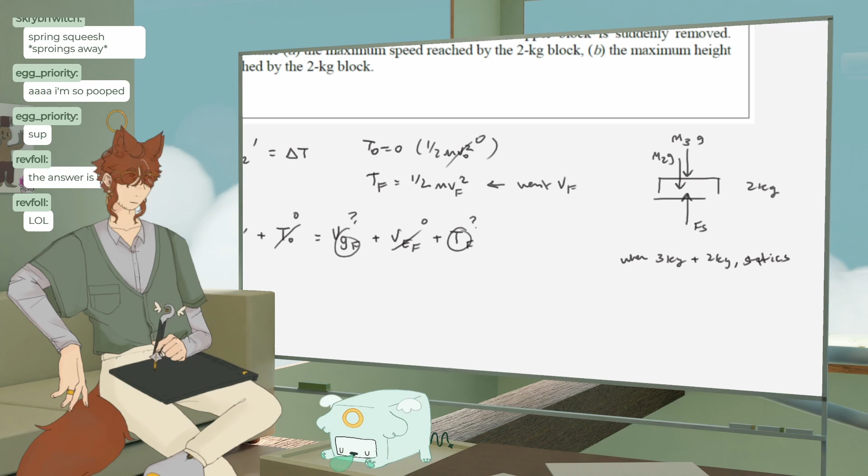Okay, we got Paper Mario.

Sorry, wait, I'm on Twitch? Yeah, we're all on Twitch.

Okay, so FS, this is great. So FS equals... because then we can do displacement. 3 plus 2, I almost wrote 5, times 9.8. Is how big our spring force is, okay? That's a big win, everybody.

We just found out this beautiful gentleman's credit card number. It's 49. I don't know how that's his credit card number, don't ask me.

Okay, so we got 49 newtons of spring force. That means that that's gonna act on our thing. Okay, sorry, my brain stopped working for a second. So, okay, we know that there's... okay, we need the maximum speed, but I feel like this is gonna be our maximum height.

I love finding out beautiful man's credit card numbers. Okay, yes, I also love that.

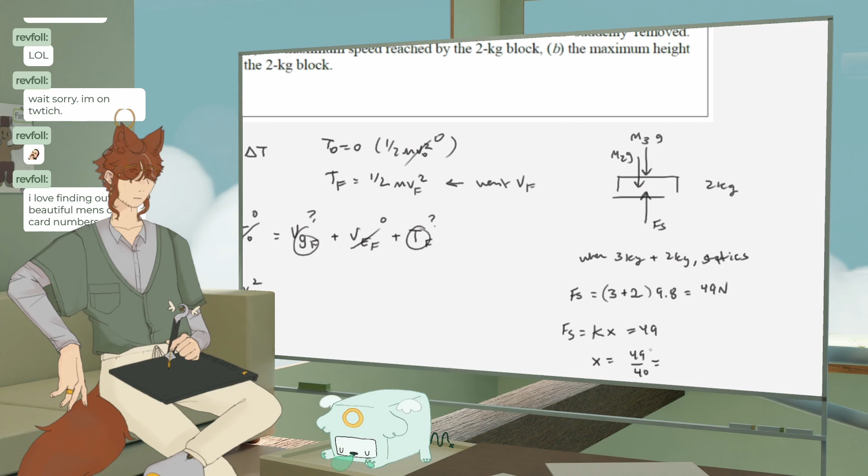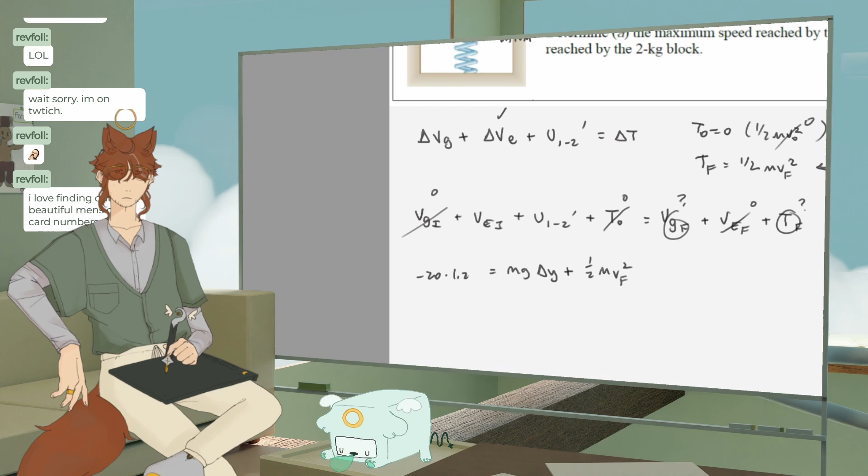So x equals 49 divided by 40. That's how much we've gone. That's how much we've squished the spring down. So then I can find the energy, and then we can have a beautiful life together. Okay. 1.225, that's how much it goes down. Okay, so it's not this. Get out of here. Okay, so 1/2 kx squared, or so negative, I guess. We're gonna just pretend that the numbers, the signs, are just whatever for right now. So k, so negative 20 times 1.2 times 1.225 squared. Okay, great, so that delta y, we don't know.

Is there any way that I can know it? Is there any way that I can not know it, actually? Let me think. Because if we think about it, the way we're putting in work is by this spring, right? And the spring is giving us all of our velocity and our gravitational potential, so it is a split between the gravitational potential and the velocity. So, do we know how much it would split between the gravitational potential and the velocity?

Wait, I'm supposed to be not doing dynamics right now. Wait a second. I was not supposed to be doing dynamics right now. We gotta take a detour, chat.

What is this? Oh, quiz 1. Okay. We gotta take a detour to work on, where's this thing? This is so sad. Wait, maybe it's not. Wait, maybe it is. What is, huh?

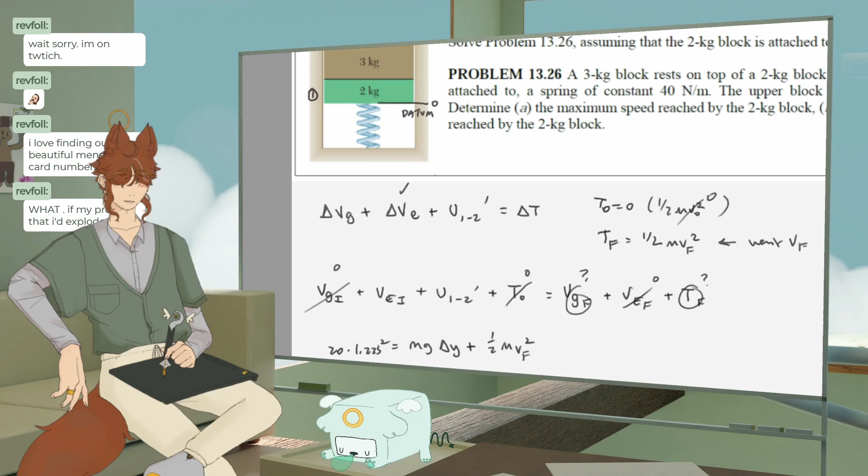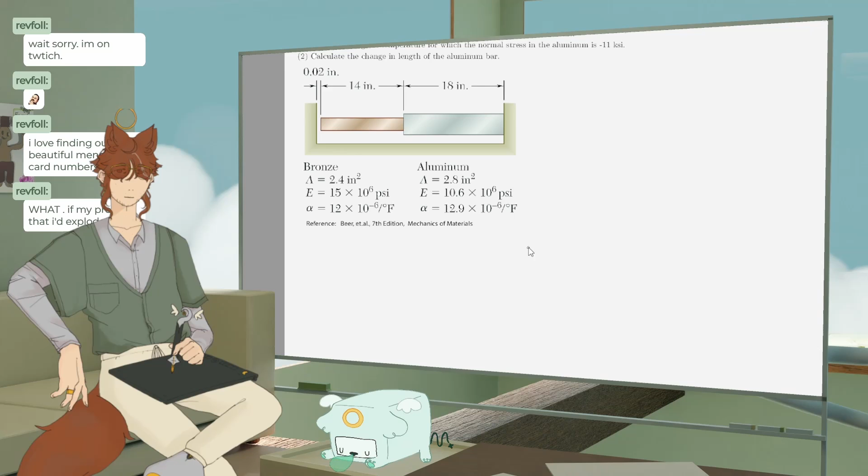It's okay, see, if you don't do the work, then you can't get mad at the work. Wow, that sucks, sorry, not being done. Okay. Beer. Big guy. Okay, sorry.

Find the change in temperature for which the normal stress in the aluminum is negative 11 KSI.

I'm so real for that. Yeah, well, to be fair, I'm doing this quiz that I have to do tomorrow, and this is the problem that's gonna be on it, or something like this.

Okay, so... everything sucks, but that's okay.

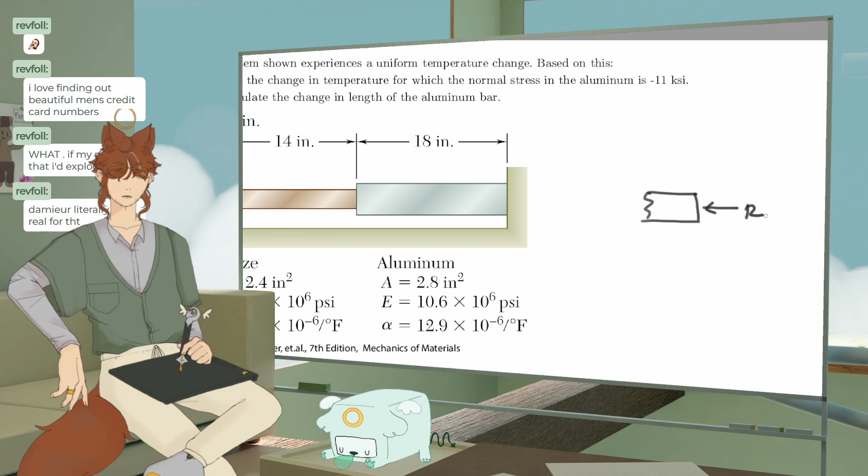We have to do some cross sections. Our first one is gonna be on this aluminum. There's a reaction here, so there's gonna be a reaction at A. Let's call this one A, B, C. And so we have to have a force, an internal force - I'll call it that, it's a bar. It's our TAB, well, I probably shouldn't call it T, I should call it F. I've been doing torques too much. Okay, so we have this one, so our RA equals FAB.

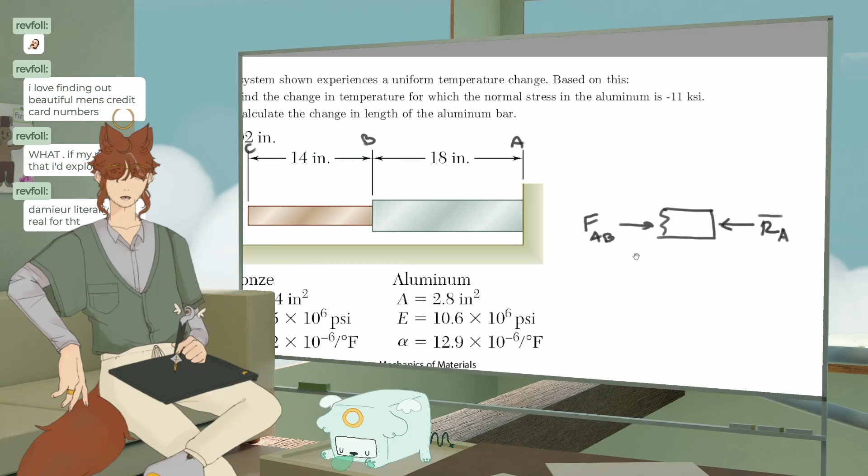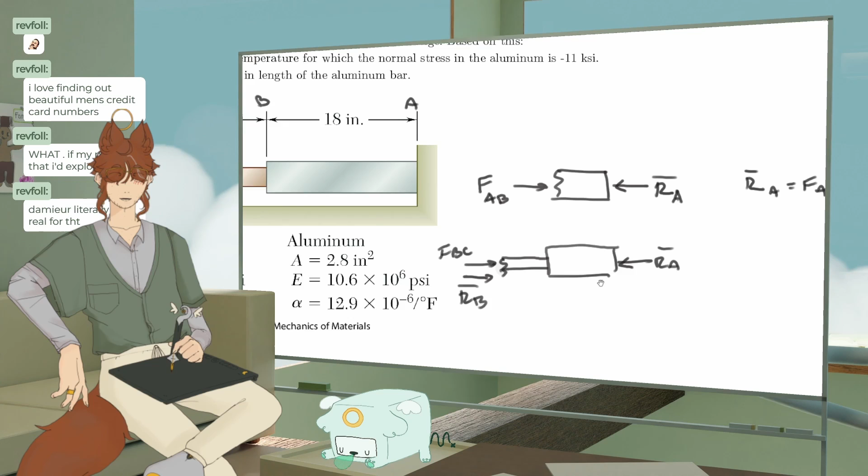And then we have this other dude, this one. It's bad, but that's okay. We've got the same reaction at A and FBC, I believe, just because there's no extra load. If there was another reaction, we'd have another reaction, but there's no reaction there. Well, actually, there's a reaction here, I lied. Don't worry about it. Wait, no, there wouldn't be a reaction there. No, we're fine, we're fine. Don't worry about it, chat. I wouldn't lead you wrong.

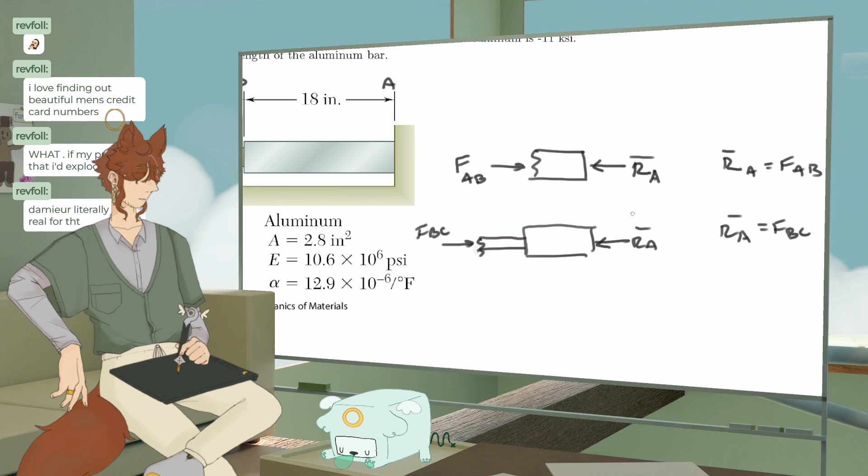Okay, so we have 3 unknowns. That's what we need, we need 3 unknowns. Because if there's only 2 unknowns we could solve it, but we have 3, which is bad, but that's okay. We're gonna solve it anyway because we're awesome. We're swag and cool, and okay, so we did our equilibrium.

It's pretty chill. Our constitutive equation - the deformation in AB is going to equal FL over, PL over EA for AB, plus alpha, whatever that thing is, numbers, letters, same difference. BC is going to be the same thing.

There we go. Okay, now we can start plugging some things in here. So for the deformation at AB, it's going to be this force AB, so that's RA, times the length, which is 18 inches, over E, which is in PSI, so that's good, we're in pounds per square inch - 10.6 times 10 to the 6 PSI, times our area.

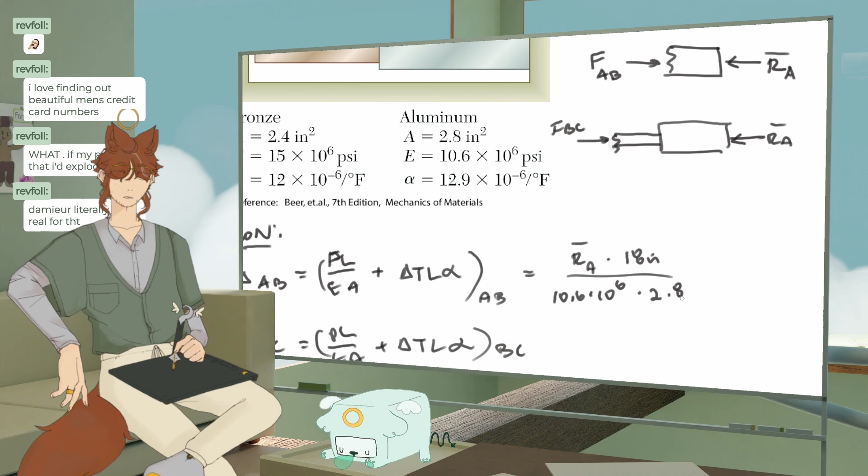Oh, it's lovely, they just give it to us. They just hand it to us on a silver platter. So now we can get a little number out for RA here. 18 divided by... This class is very boring, by the way.

Dude, the Pharaoh's Curse, what is it? I don't know what it is. I'm so sorry, I'm so sorry for the cozy tag.

I'm gonna cry. For everyone who came to just have a nice mechanics of materials problem, just like mechanics of materials and chill, I'm so sorry. I forgot to add the temperature. God damn it.

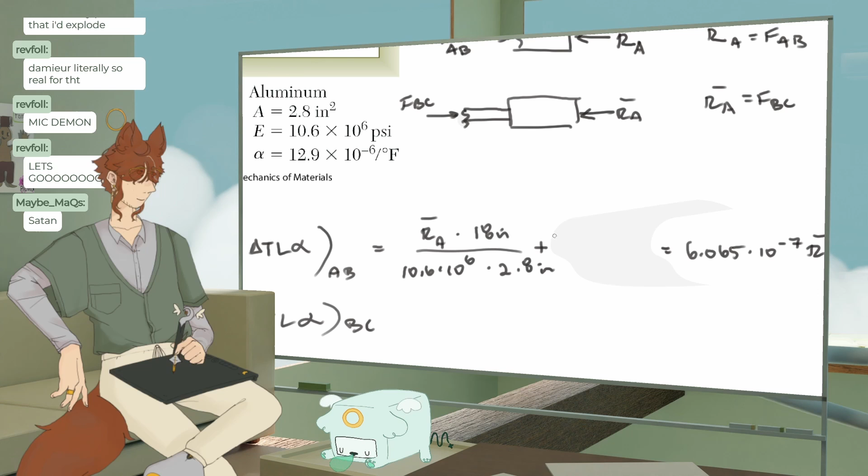Okay, don't look at that. Oh, that's gonna really annoy me. That's fine, my whiteboard is a little not white there. It's because I usually work on this because it's like better for my eyes. It's fine, it's fine, it's fine. I'm so normal.

The mic demon asks, what's the temperature change? Oh, we're trying to find the temperature change. Lol, okay.

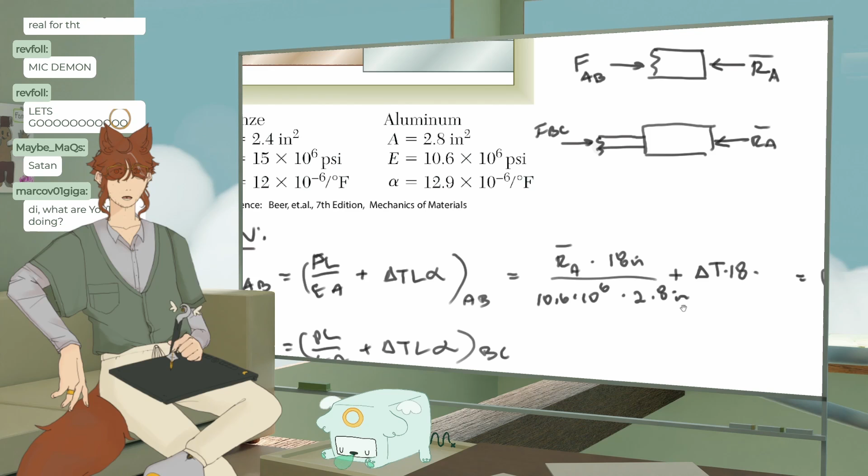And then I have my alpha here, which is 12.9. Okay, we're gonna have 2 equations and 2 unknowns, which is good enough for me. So we'll probably just chuck them into a, whatchamacallit, matrix. I'm just chunking this number in here.

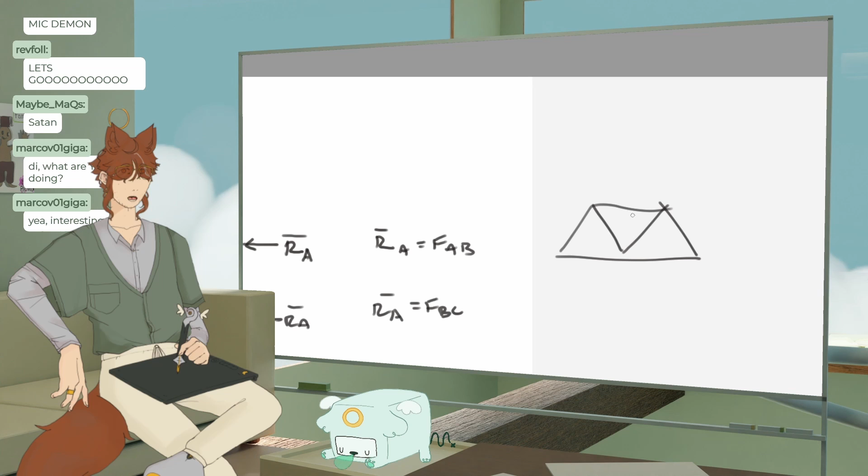Yeah, interesting, yeah, it's pretty cool. Like you can figure out - one of the really cool problems we did, maybe the coolest one in the class, was about bridges that aren't strong enough. Like there's a pre-existing bridge that's not strong enough materials-wise, maybe it's rusted or not seismically up to code. And you'd have to take out the whole bridge and rebuild it, which would be a lot of money. But they figured out you can add a certain polymer wrapped around the pre-existing concrete that makes it stronger.

So the question is how much of this do you need to make the bridge actually strong enough, to have it not twist or break from the force. You can figure that out by doing this kind of analysis, which is really cool, because we did it and figured out that you could reduce the twist by like 50% if you only wrap it twice, which was pretty cool. You don't have to take an entire bridge down, you can just wrap it with some shrink wrap essentially, and it makes it strong enough. Pretty awesome, pretty epic actually.

This one is also RA. I may be doing this wrong, but that's okay.

Oh, I'm so glad I don't have to calculate the polar moment of area. I don't like doing that calculation. It's 15 times 10 to the 6th times 2.4. It's delta t times... where did I get that 18 from? Oh, length, 14 times 12.

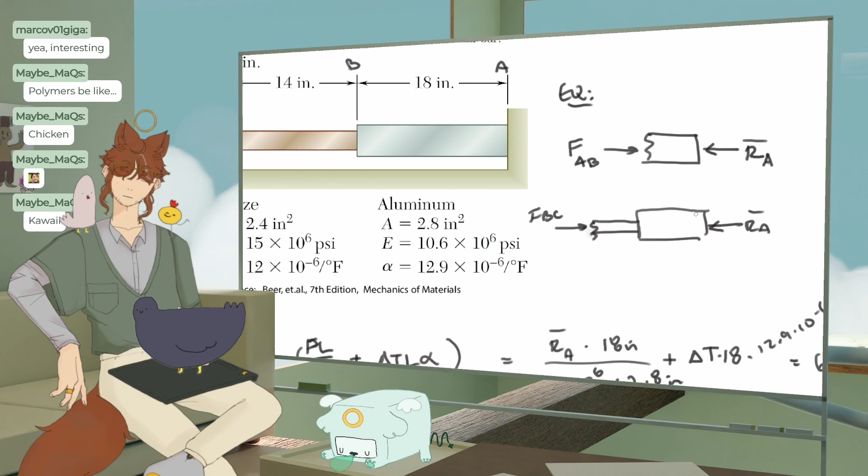We have to do the kinematics. So we have these beams, and we have to find the change in temperature for which the normal stress in the aluminum is negative 11 KSI. Okay, so what that's saying is we're gonna have to relate these deltas. But we also need to say that the stress... that's the stress, I think. Maybe, I don't know, don't look at me. The stress in the aluminum, which is AB, is equal to the force over the area. So wait a second, it's equal to, wait a second.

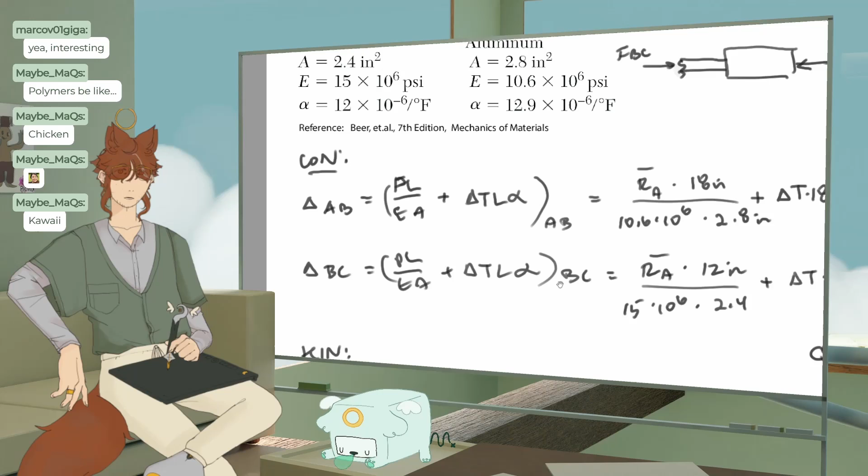Is this really that indeterminate of a problem? This feels not that indeterminate, it feels like they're giving me a bunch of stuff. They're giving me negative 11 KSI. Wait a second, okay whatever, negative 11, the negative is weird a little bit. So that means that 11 KSI, so 11,000 equals, or times area, which is 2.8, equals FAB. Wait, they just gave it to us? Wait, I thought we had to solve for RA. Huh? What? Did I accidentally click on the determinate problems? No, this says that it's indeterminate.

Can you explain all of basic physics to me? Oh yeah, sure, okay, yes I can. What would you like first? Is this just like for fun, or is this like you're in a class and having trouble with all these things? Because that will change the way that I talk about it. But dynamics is basically physics, so it's a great place to talk about stuff conceptually, actually.

This is so weird to me that they just give us this. Because then, what are we trying to find? The temperature change? Oh, wait, we have the temperature change. Okay, maybe we do need this. Yeah, I need this for a test. Oh okay, let me think while I do this.

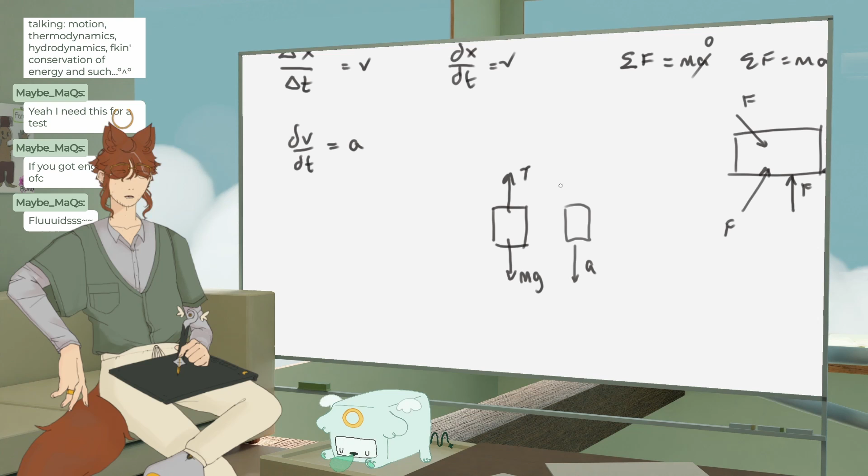It's conceptually useful to be able to see how, if one force changes, that changes the other forces. A good example: if you have a weight with tension going up and mg going down, and it's accelerating downward, knowing how changing the mass changes the acceleration, and how that changes the tension, is really good to be able to visualize.

Some people like to visualize it as bars, like if I have forces in equilibrium, if this one goes up, this one has to go down by the same amount. There are lots of different ways you can do that, but it's always a really good skill to be able to see or understand the relationships between the forces.

It'll make your life a lot easier for questions like this one, where if it's at the top of this thing, the potential energy is going to be as high as it's going to be, and we have no spring. If I was doing 3.26, we'd have no spring potential energy because that has all been converted to kinetic energy.

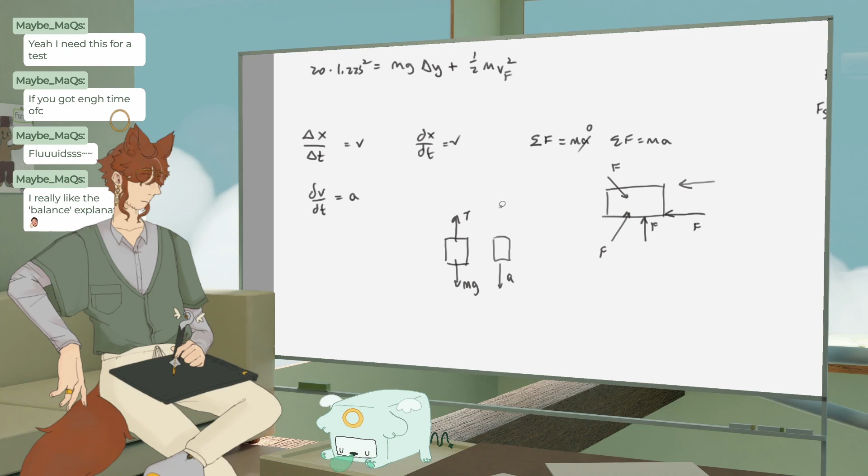Not about forces, but I really like the balance explanation. Yeah, me too, because physics is a lot about that, especially with thermodynamics. If you have PV equals nRT, saying okay, if I put the pressure down, but volume has to go up to keep the temperature the same.

Being able to see that and be more familiar with it, because it's not really a math thing necessarily, it's more intuition, more logical. Let's say with nRT, if V is constant so we don't have to worry about it, if T goes down, our pressure is also going to go down.

Being familiar with the relationships in physical equations - whenever I learn a new physics equation I try to do a mini proof in my brain. Take the displacement of a bar in mechanics and materials: it's PL over EA. As the force increases, our displacement increases, which makes sense - a bigger force on the end of the bar makes it go down more. Similarly, if our bar lengthens versus is very short, it's going to deform way more under the same force.

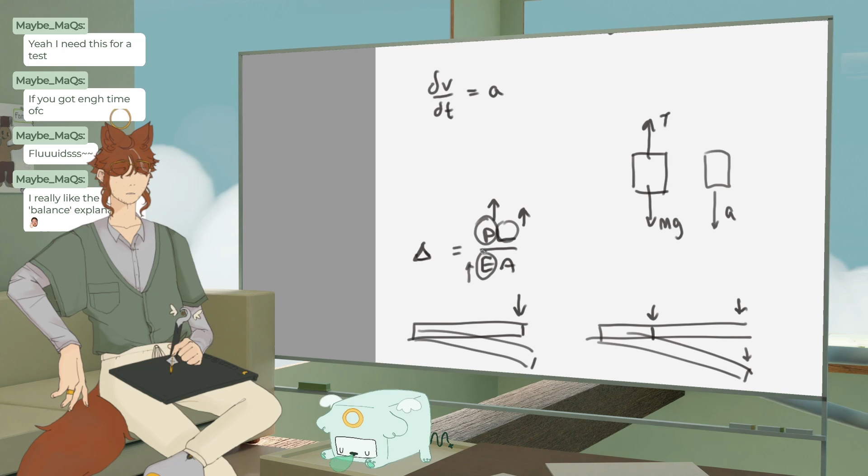So that also makes sense being on top of the equation. Then as the elasticity goes up - which is kind of weird - as it gets more elastic, we're going to have less deformation. Same thing for area: if the area gets bigger, we're going to have less deformation. Being able to see this matters because you're not asked to prove it, but knowing how the variables in an equation change things is really important for understanding physics at a deeper level.

So you have forces, you have motion, and putting those together you can talk about work. In simple terms, work is a force exerted over a distance, which gives us a unit of energy. If I have a force over this block and it moves 1 meter, how much energy have we put into the block to get it to move? Or an even simpler example: if I have a block on the ground and lift it up, how much energy have I given it?

Talking about work, there are lots of different ways to find work, and it's kind of a funny, weird little concept because you can have conservative versus non-conservative forces. My professor explained this really well. Gravity is an example of a conservative force. We can move this block up and down as many times as we want, but as long as it goes up here, it doesn't matter what we did in the middle, because it's conservative. It only matters the start location and the end location.

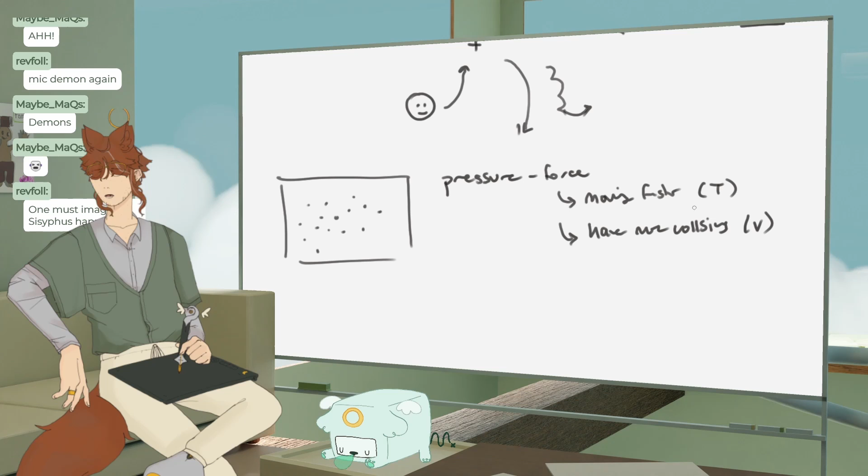The big things to know are like pressure is based on force. So a couple cases that might make pressure increase is if your molecules are moving faster, which means they're hotter, so that has to deal with temperature. Or if they have more collisions, which has to do with volume. So if you're making your container smaller, your particles are going to be hitting the walls more often, so they're going to have a higher pressure. Or you can just have them move faster, and that's going to give them more energy, and when they collide, conservation of momentum, conservation of energy stuff, they're going to exert more force on the wall.

What else? Temperature is like the average, basically just speed when you're talking about thermo, like average kinetic energy of a particle. The only type of energy you can technically have is velocity-based. You can have potential energy, but it's not really real energy - it's just kind of the idea that you're going to do something sometime soon.

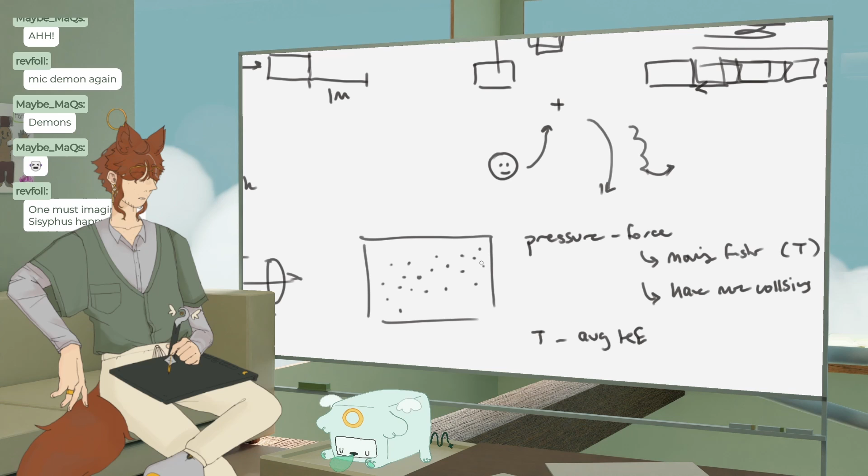And then volume is, I feel like, more self-explanatory. If your volume gets bigger, it's not going to affect your temperature necessarily, because you aren't changing the speed of your particles, but it is going to affect the pressure. If you have a bigger volume, you're going to have less pressure.

I think you said conservation of energy. I feel like conservation of energy is actually not super tough. All the fundamental stuff - that's crazy, that's like a lot of stuff. My first semester of physics was mechanics only. But then again, I had to take physics 3. But it was also first quarter physics, so semester versus quarter is a little different.

What was I going to say? Oh, conservation of energy. Essentially, the idea is that energy can't be destroyed, ever. It's always going to go somewhere.

So that means if you have a block and it's moving and going over a rough surface, we have energy that's lost as it slows down, which is going out into the environment as heat.

So conservation of energy or conservation of momentum is just taking all of the momentum, all of the energy, and accounting for it. All the energy you have at the start equals all the energy you have at the end, which is exactly what I was doing here.

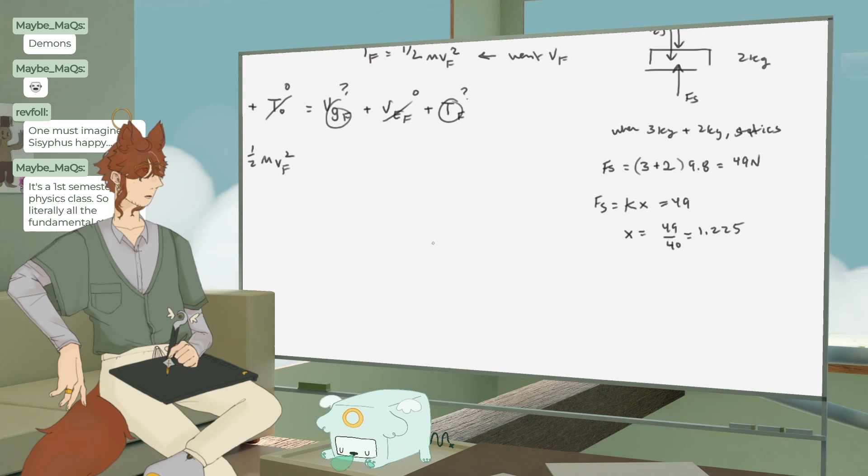But when it comes down to it, really everything is just a particle, and it's all particle physics. So that's your kinematics, your work, your forces, all that kind of good stuff.

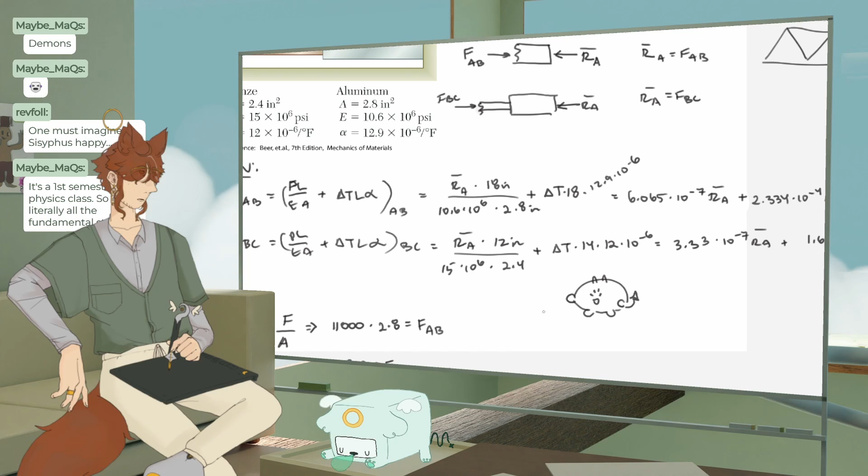There's this one, okay, this is wrong. This one. Okay, so the change in them have to be equal, actually not really because of conservation of energy, but more because of a constraint that we have — like your bar can't break through the wall in this problem. So we know that this plus this is going to equal this.

Oh, it is indeterminate. Okay, so oh god, I don't want to have to do this. Okay, 6.065 plus 3.33 is 9. So 9.395 times 10 to the negative 7th RA, which we can solve for.

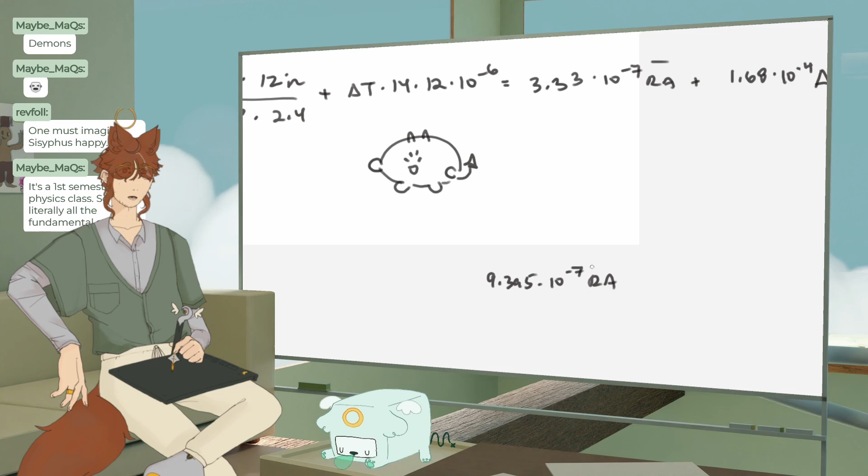Plus, I really hope this is right. It would really make my day if it was right. It'd be lovely to get a dub. I so often take L's.

Aw, thank you, I'm glad it helped.

If you have any questions, feel free to ask. There's a chance if it's particularly fluids — I have not done that in 2 years, so it's been a while for that one — but other than that, I do know some things.

Times 10 to the negative 7th. Oops, this times 3.0. Alright, so 0.041. I really hope this is right. This is like a very small temperature difference, but it's 0.02 inches, so...

Actually... okay, I got a negative number. That's not a good sign. It's actually a bad sign. Where did I go wrong? What did I do wrong?

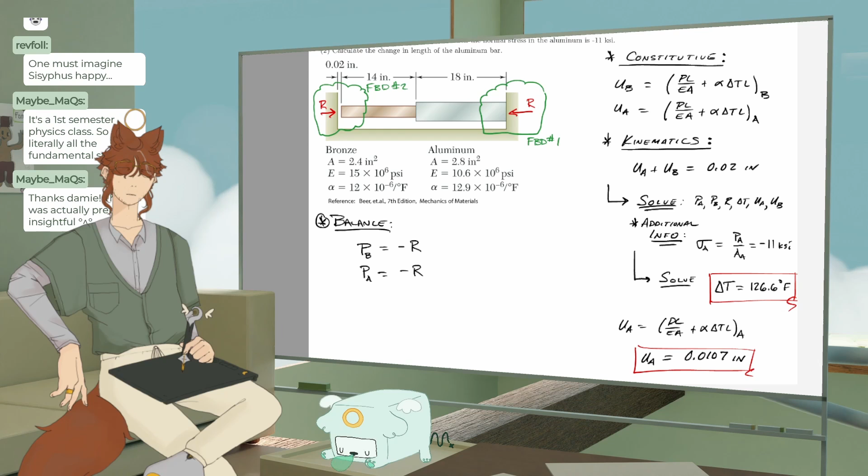Huh, I mean so I'm getting the same thing. Wait, it's negative R though. Wait, why is he saying negative R for both of them? Kinematics, okay, I got that part right. I don't really know any of the work that he did though.

That's crazy, dude. Wait, do I need to click on it maybe? Nope, that's all I got. Okay wait, there's a video solution. Back with another problem, okay, sorry. No, okay never mind, the video solution is also bad.

Well, that's depressing. It's okay, I guess. I could have just done something wrong, I guess.

I just check my... he could have given any intro steps or intermediate steps, that would have been awesome. Okay, well I got some points. I think I'd get like a 7 out of 8, but I want to get it right.

The setup isn't incorrect, and actually the equation isn't incorrect either. I would have to do a different thing - I'd have to do 2 equilibriums if I wanted to have 2 reaction forces up there. Because I'd have to say overall equilibrium, RA minus RB equals 0, and then I could basically plug in to have this happen.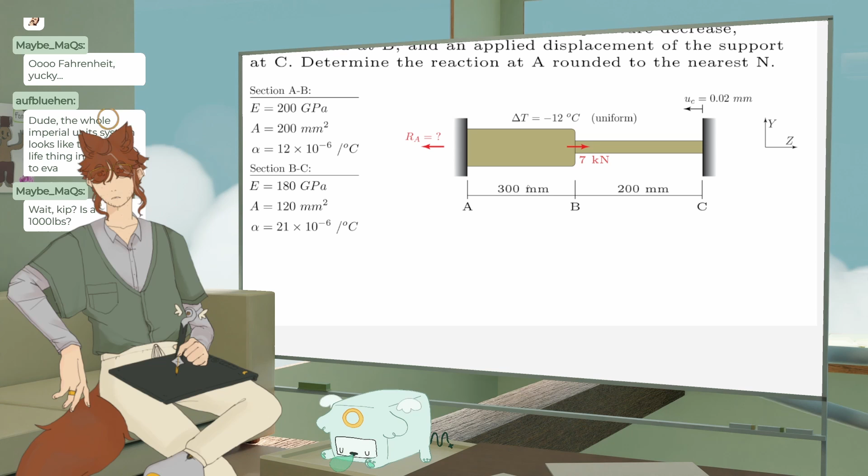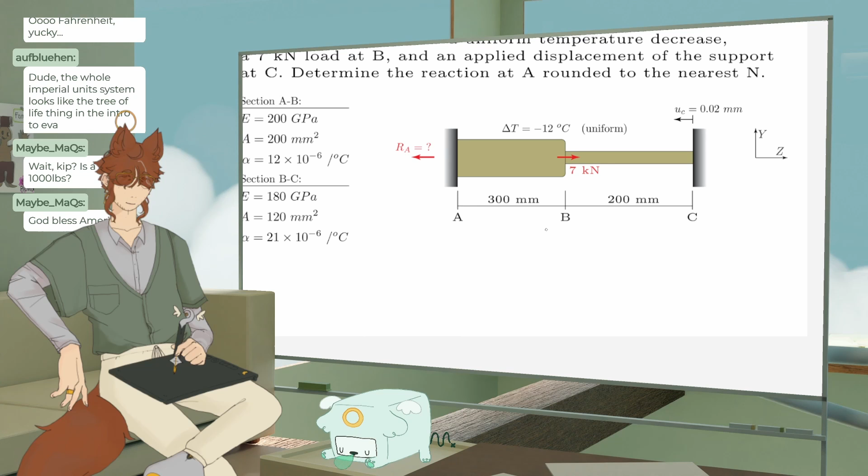Well, I guess the fastest way to do this would be, so we know that there's an applied displacement that actually displaces. God bless America. I guess we just start with, what's the problem? It's this problem, this is the problem.

It's a bar subjected to a uniform temperature decrease, so it's an indeterminate problem, which means we're gonna have some extra forces that we don't know about, and we're gonna have to solve for those. I'm gonna start by doing a first free body diagram of AB. So there's a reaction here, which means that the internal force is gonna go this way. So FAB equals the reaction. And then we can do our other one too.

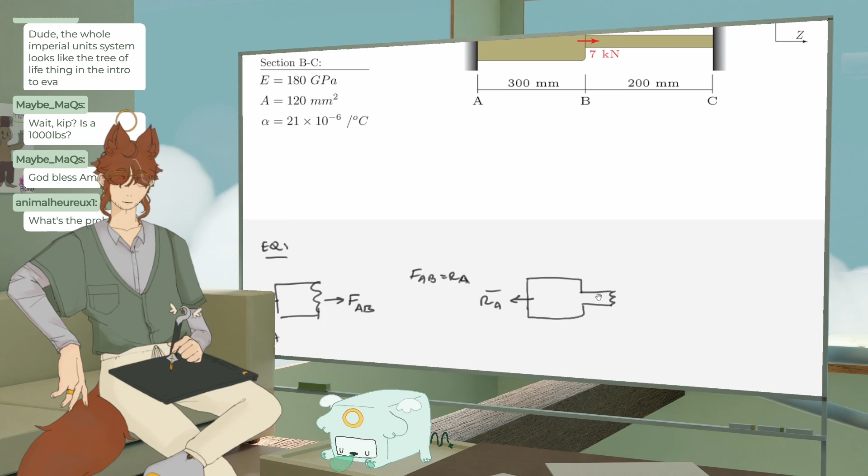It's a little silly, a little goofy, but don't worry about it, don't worry about it. Honestly, it feels like these problems, when you only have one reaction, they're kind of a gimme, because they feel like they're not indeterminate, but they are. I don't know.

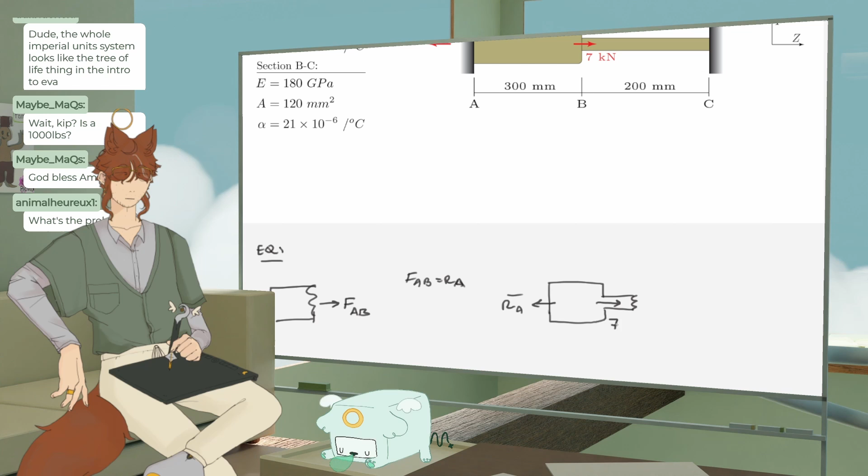And then we have, oh no, we have a 7 kilonewton load here as well. That's like an external one, and then our internal one will be FBC. So FBC, I guess I should probably put it in terms of RA, huh? Nah, we're fine, it's fine. Okay, FBC equals, plus 7 kilonewtons, we'll do my due diligence, equals RA.

I kind of don't like writing it like this. I would rather write it like... well, I guess that's actually not too bad. I guess I would rather write it minus RA equals 0.

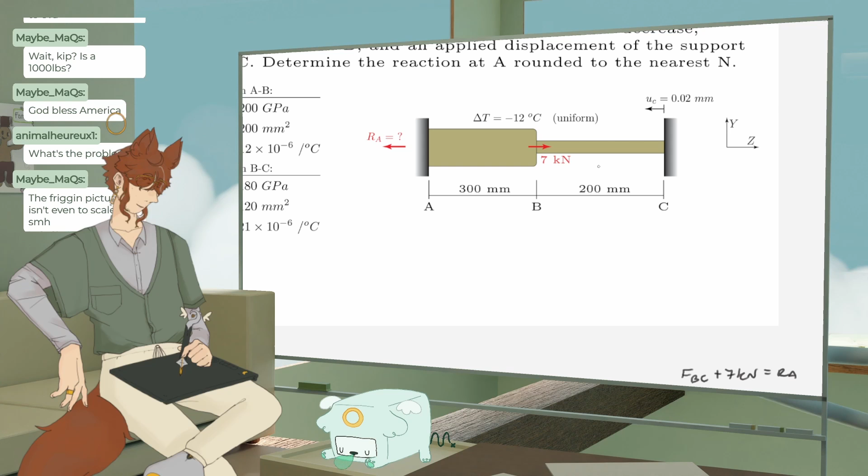The picture isn't even to scale, SMH. Oh my god, nothing is ever to scale. It's kind of... oh wait, no it's not. 200 millimeters, kind of to scale. Wait, that's really funny, yeah. Why did they do that? Normally they're more to scale than that. That's kind of goofy.

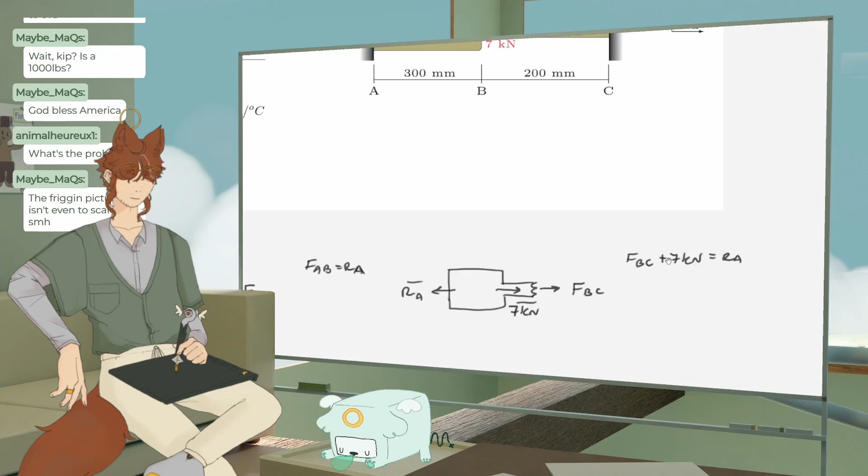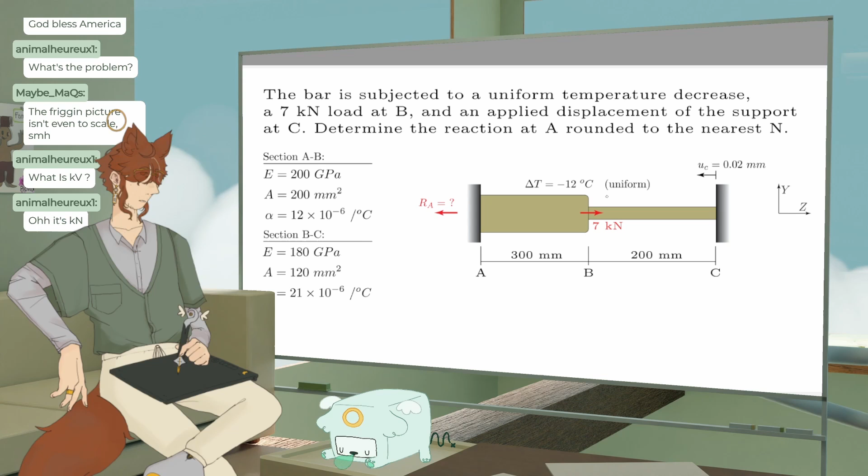What is a KV? What are we seeing, KV? Oh, KN, was it cut off? A kilonewton is KN. So we're in metric, everybody's favorite friend, the metric system. Oh, it's KN, yeah, was it cut off right there? It'd be like kilovolts, I guess, if it was KV. We're not doing electrical engineering, don't worry about that.

Okay, so we got some equations, we got 3 unknowns, we love that, whatever. It's fine, I shouldn't say whatever. Okay, the displacement of AB. They actually tell us that there's some extra displacement at C, I guess, but we'll figure that out. Wait, an applied displacement, oh, that's weird. We'll have to add that to that, I guess. That's kind of, oh, that's kind of, okay, whatever, fine.

Okay, so we're gonna have PL over EA plus our temperature difference for AB. And then for BC, this is gonna be PL over EA plus our temperature difference plus the 0.02, because that's just, I guess, we apply a force that gives us that, but instead of giving us a force, they just give us that. Okay. Now this is in millimeters, so we do have to be a little careful when writing out our plugging in stuff. So we're gonna put everything in terms of RA for now.

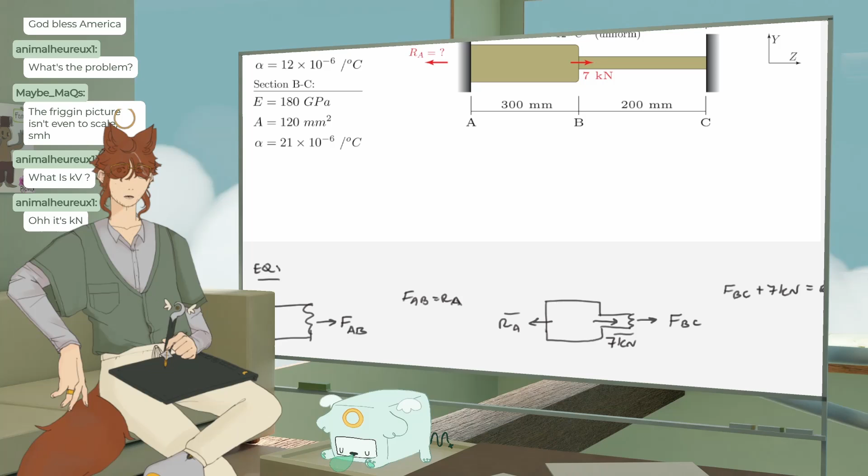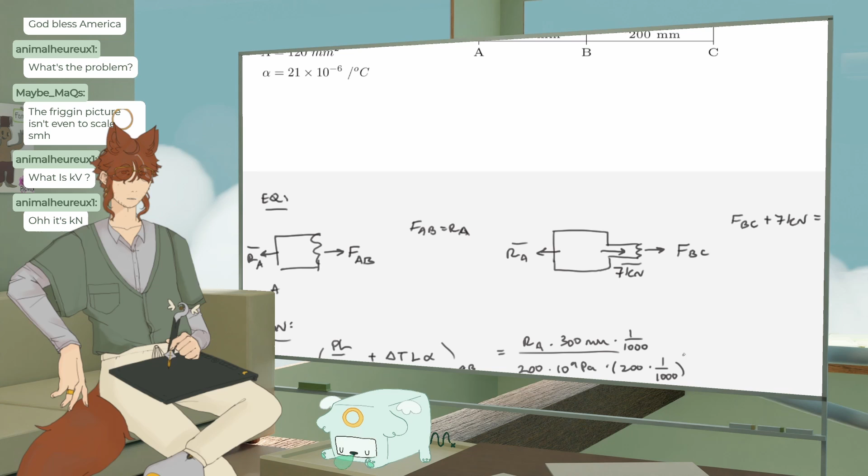So RA for FAB, right? We put in that, and the length of that, which is 300 millimeters. I'm gonna instantly divide this by 1,000 so you get into meters. No way that we're not. Then we got 200 gigapascals, so it's 200 times 10 to the 9th pascals. We like pascals. And then we've got area in millimeters, of course... well, the reason why it's in millimeters is because... Oops, 200, 1,000 squared.

The reason why it has to be so small is because to have the model that we currently have for this work out nice with the algebra, instead of doing a bunch of linear algebra, we have to assume that it's very, very, very long, proportional to its cross-sectional area. So we gotta have these tiny little millimeter guys.

And then we have -12. Okay, so here's the thing. We're pulling outward, but we're shrinking it.

How old am I? I'm 20.

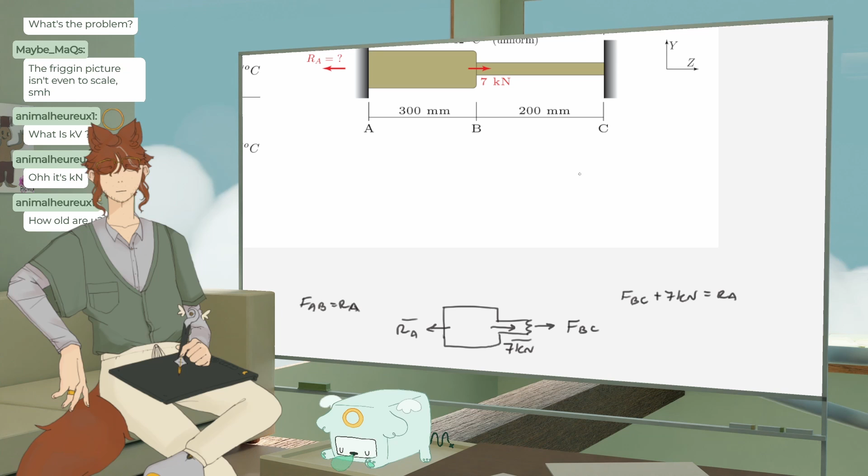We're pulling outward, but we're shrinking it at the same time. So that's gonna actually be a -12.

And then our length again, so that's 300 divided by 1,000. Okay.

Oh no, you've collected my data.

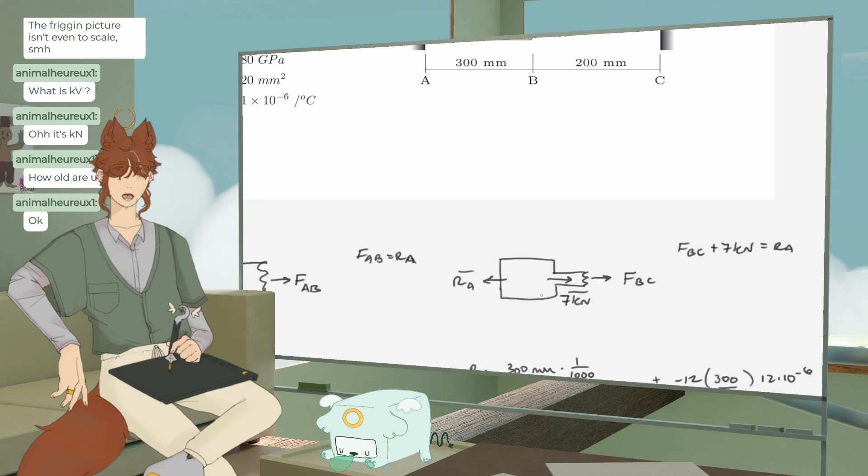Okay, and then this one is the same thing, and we're gonna... Okay, the question of the kinematics for this is gonna be a little weird, but we'll get there later.

Okay, so RA is actually, we're gonna do FBC equals RA minus 7 kilonewtons.

Give your address. I joke, I funny joke. Average Twitch streamer. Okay, do I want it in kilonewtons?

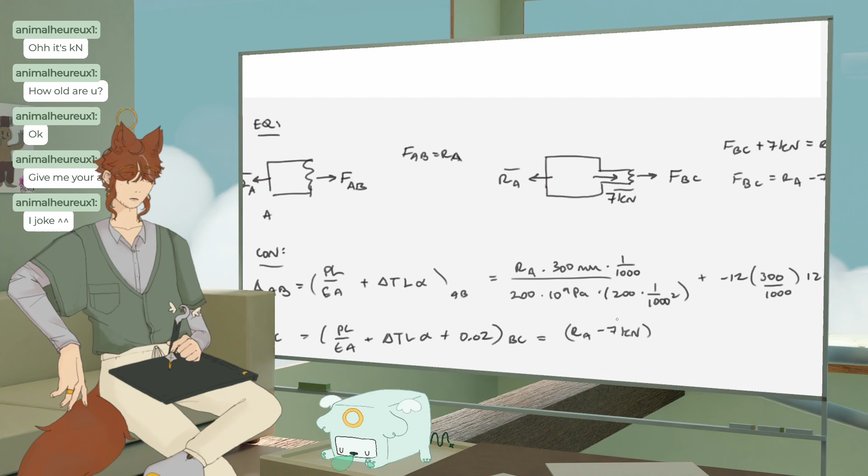I don't want it in kilonewtons, I'll just do 7,000 newtons. Times, what do we got? 120 millimeters. Over 180. 80 times 10 to... there's a lot of numbers.

Lots of numbers here. I don't enjoy this part because, like, oh god. There's so many numbers, and none of them are really that important. It's okay, we'll get through it.

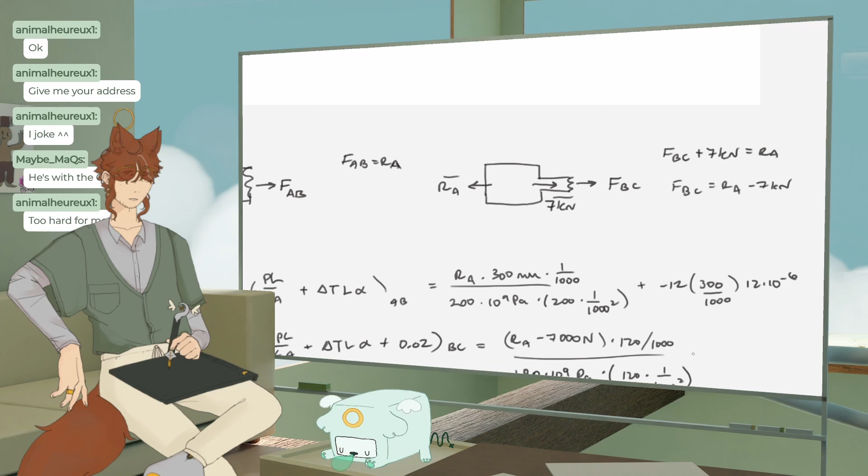I'll live. Plus -12. So, okay, for C... yeah, it's the same thing, except not 300, this is 120. And I don't believe it's 12. It's 21. Yeah, then plus 0.02.

Too hard for me? Oh yeah. Don't worry about it.

They're static, dynamic? Oh yeah, I just need to do this and then I was gonna go back to dynamics. Unfortunately, the dynamics is not any easier than this. This is just grunt work, but dynamics is like, oh god, I have to think and my brain hurts now.

Okay, before I just start joyously plugging numbers in, let's figure out what the kinematics for this is gonna be. Okay, so we have to figure out the reaction at A. I guess we kind of need to figure out if... okay, we're gonna assume that it's 0.

Is that true? Do I know the spectral theorem? Ooh, no, I don't know the spectral theorem. Wait, let me see. Spectral theorem. Wait, maybe I do actually. I think it's diagonalized. Is a result about... oh, I don't know about it, but I do know about this kind of thing. I would love to hear about it if you'd like to talk about it. Or do you have a question about it? If you have a question about it, I probably can't answer it. I definitely can't answer it.

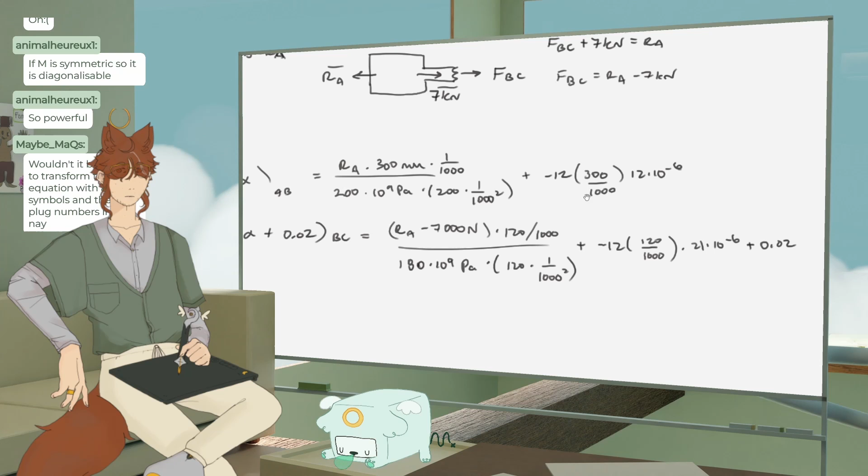Wouldn't it be easy to transform the equation with all the symbols and then plug numbers in, or nay? Yes, except for the fact that this is just RA plus some constant, so whenever I have a bunch of stuff here and it was an issue, I would transform it. But because basically everything is getting out of here except for this, I kind of just leave it like this, because I like to do my...

How do I describe it? It's like I like to do my math in chunks. I'll rather question, what is 40 divided by 3? Great question, definitely not putting it into a calculator. 13.3333, I knew that off the top of my head. I'm so cool.

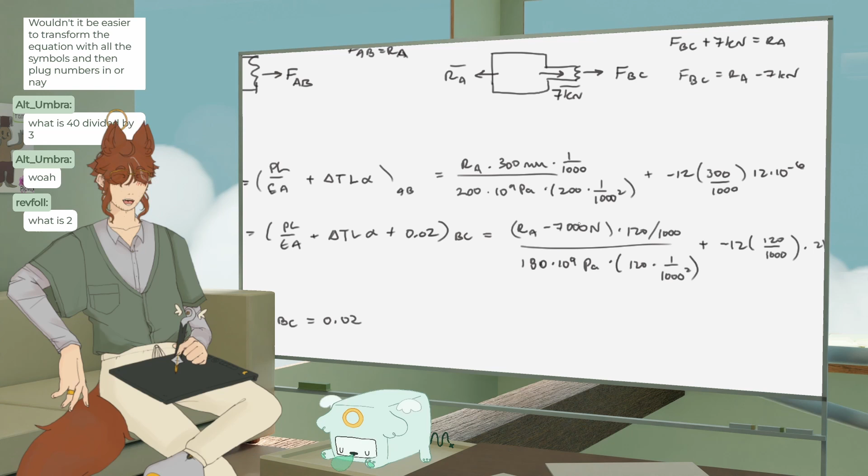I totally knew that one. Come here because you know a guy who can do numbers well, for sure. What is 2? More than 1. Or maybe not, some people disagree on that one, actually. Okay, 12 times 3 times 12.

They can't make these problems nice, ever. They have to make them awful.

So it's so goofy, okay. Let's see, and 120 is like annoying too. It'll be 0.12, I think. Yeah.

Oh god, okay, so this one is a little more annoying. So 0.12. I'm gonna do it for R first, the successor of 1.

0.12 divided by 180 times 10 to the 9th. And then I can just multiply this by the other thing. Times... Okay, that, and then 5.5556. I didn't need that many 5s.

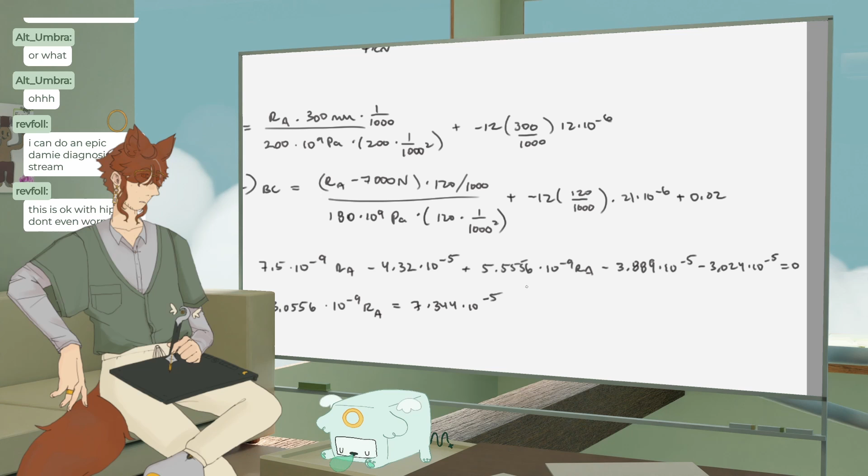Rev, this is the first stream that Rev ever does and instantly gets banned. But not by Twitch, just banned from the practice of being a psychiatrist.

Okay, I got a number. It's a good number. Was I even trying to find the reaction? I think I was. 5.625. Oh, kips, whoops, that's kilonewtons. 5.625 kilonewtons, 5625 newtons. I said that a lot.

Okay, if this is wrong, I am gonna cry. But that's okay. It's not that hard, I don't know why. Okay, it's not right, it's not right. God damn it, my license taken away the day after I get it. Okay guys, I did it for the bit.

Delta AB plus Delta BC equals negative. Oh.

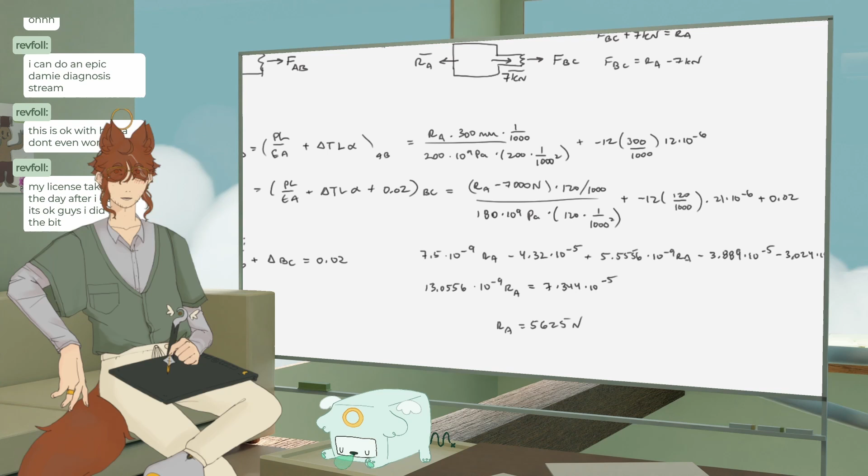Okay wait, are the temperature changes negative? It looks like they're positive. Why would they be positive, gamers? Why are we... okay, they're negative. They added them negative after. Oh, they probably put them in with the T.

Okay, so the only thing I did was I messed up the negative 0.02. And I shouldn't add the deformation in there. So basically I just...

It's this, and this. Oh okay, it's not that. Look, I can wait a second, look at this. Wee, okay, sorry.

Okay, oh fuck, god damn it, I didn't mean to hit that, I meant to hit this. I don't know why I keep getting that. There we go. Negative. That little guy ruined my life. Right there, okay, he didn't ruin my life, it's pretty close.

Alright, let's do dynamics. I don't want to do this anymore. Bored streamer, this one is gonna make my head explode. I don't really know if the other ones are gonna be any better though, because I already said the other one that I was trying to...

Wait a second. There's 2 random conceptual questions in here. What the hell? Okay, I don't want to do that. I want to do the big chonky boys.

Oh, this looks awesome. Not being sarcastic at all.

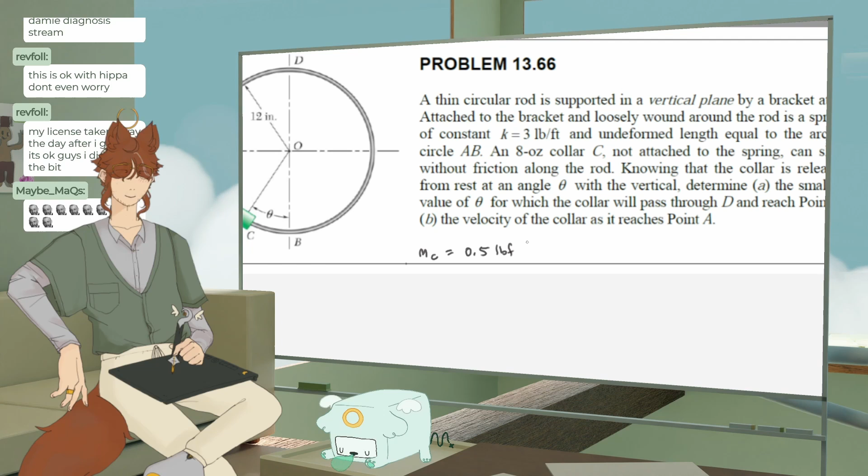Okay, let's quantify what that means. What do we have to find? Okay, so for A, we know that the distance it has to travel needs to be 2 pi r.

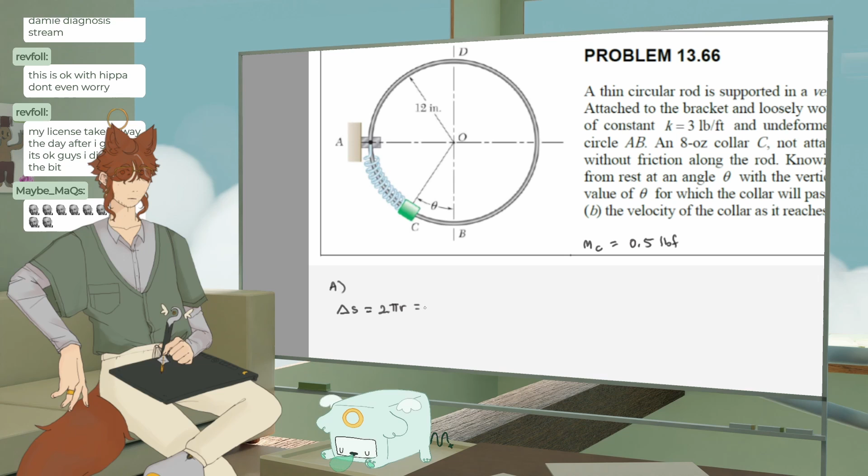So that's gonna be... now do I want to keep everything in feet or in inches? I think I want to keep everything in inches, so we'll make that choice. So this would be 24 pi inches, that's how far it needs to travel. Okay, how is it traveling this far? Well, it's gonna have some spring force.

Okay, let's write this out. So we have a T0. This is gonna be 0, doesn't have any kinetic energy at the start. It's gonna have some initial gravitational potential, which will come from theta.

It's gonna have some spring potential, elastic potential, and then it's gonna have some work done to it potentially. It was VGF plus VEF. Okay, I don't know why I made them bigger on that side.

All right, well let's define a datum. That's another good place to start, right? We'll say this is the datum. Okay, well we know that VGI is gonna give it some height because of theta, right?

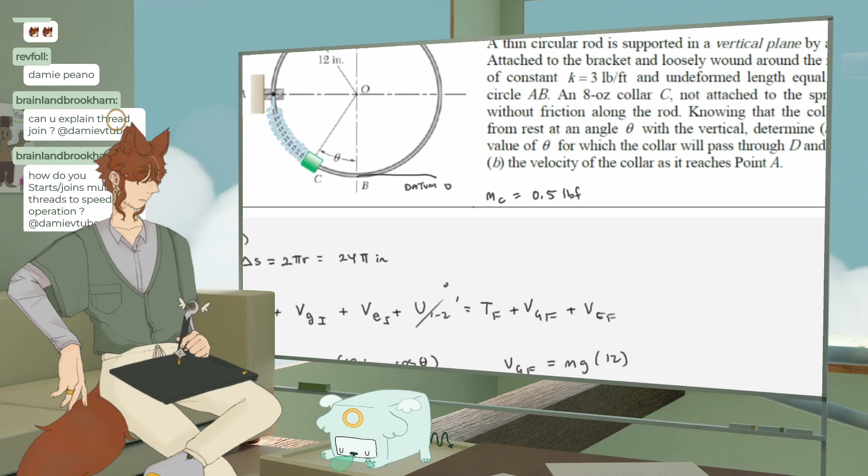How do you start, join multiple threads to speed up operation? Oh, I have no idea. That's like a complicated question. I would maybe check out that. That's for like the easy one.

To speed up operation? Oh, I don't know. I have never done any optimization thing. I literally said to myself, Damie, you work in computer science. You're not working in optimization. I went, okay, that's fair. And then I didn't work in computer science either.

Speaking of computer science, I could do my MATLAB lab.

Okay, wait, so TF. Is there a way that I can just figure it out? Oh wait, maybe because it's a circle? If I know the velocity... No, I can't do that. Because it's angular velocity, whatever. That's not gonna work. We're probably gonna have to do that for B.

The value will pass through D and reach Point A. There's gotta be something, there's a link I'm missing. I feel like I'm in Blue's Clues, but I can't find the clue. What part am I missing? What could possibly give me anything about this?

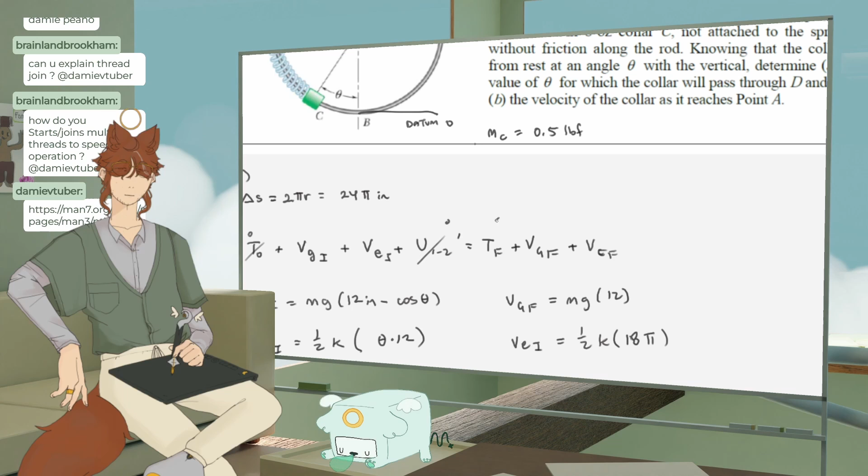So this is equal to 1/2 mv squared, vf squared. For which it will... Okay, if it just passes through D, maybe we just say the V final is 0? Right? Because the minimum value, V equals 0 at D. Okay, I don't hate that. That seems good. I'm gonna say it's 0.

Whoop-de-doo. Okay, now I just have to solve this thing. This is not a fun solve. I think I might need to graph this one, I'm not gonna lie. There's a cosine theta and a theta added together. I think we might need to be doing a little bit of graphing.

Fun times, chat. Okay, M. Oh yeah, 0.5. Wait, no, wait, MG is 0.5. Oh wait, these are also gonna cancel. 0.5 cosine theta, plus... K is 3 pounds per foot.

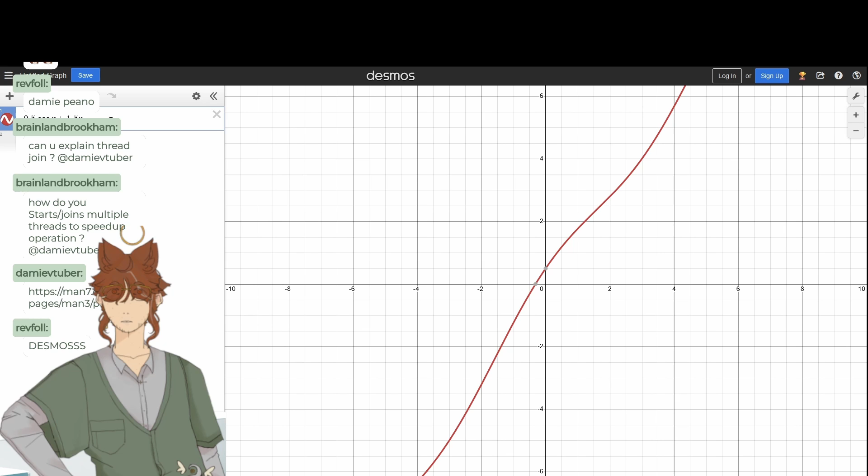We got one line. If I zoom in far enough, it'll give me an answer. 4.712. I just opened Spotify. 4.712 radians? Is that correct? I don't know. I don't know if that's correct at all. Let's see, does it make sense in any sense of the word?

1/2 times 360 divided by 2 pi. I don't think that's correct. Funny story. Yeah, I got 269. That would be above A for sure.

What is this supposed to be? Oh no, this is so scuffed. It's supposed to be 34.8. Okay, wait a second. But what if I subtract 180 from this? What if I... okay, no, I'm doing something wrong. What am I doing wrong?

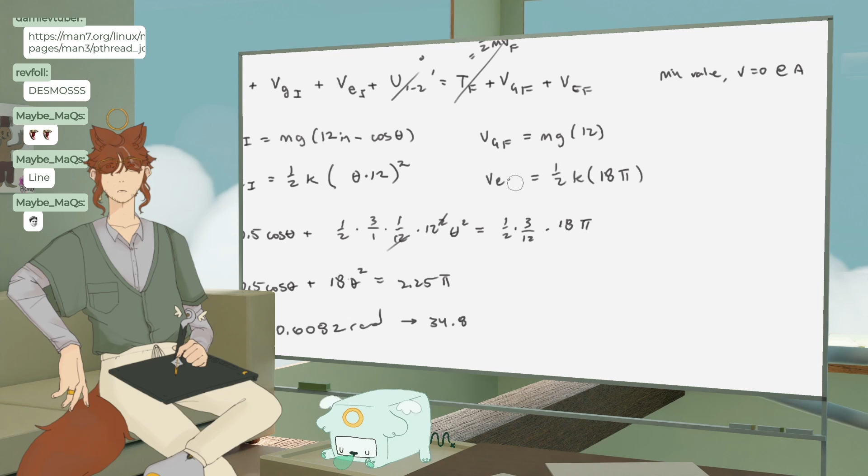What could I possibly have done wrong is the thing. Maybe I forgot. Okay, I could have forgotten a little thing somewhere. This is supposed to be F. Oh. Huh, yeah, maybe that would do it. Yeah, maybe that would do it.

I don't really need to do the times pi squared. 5.0625. This is gonna get it completely wrong. Okay, 5.0625 pi squared. Back to Desmos. We're just going on a lot of field trips today. 5.0625 pi squared.

Uh-oh, it's really out there. 1.667. Thank you for Metal Pipe.

95. God damn it, we're back to where we started, being bigger than 90 degrees, which is not correct. What are we doing wrong, chat? Oh god, maybe my spring force is not correct. Wait, does it leave the spring or something?

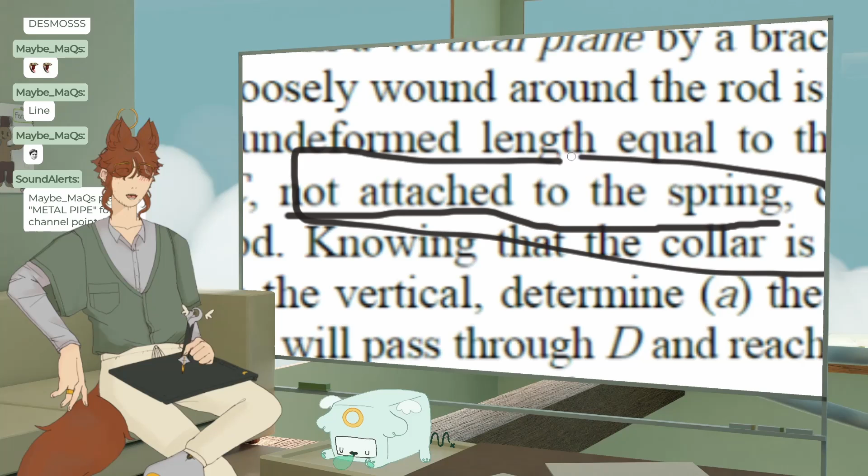Oh, wait. Not attached to the spring. Oh, okay, so funny story, there's none here. God damn it, I'll stick to chemistry, thank you very much. There's none here, there's none here, always none, and then 0 here.

Damn, it's not attached to the spring, I fear I am. My brain is on this spring. I was like, how is the spring letting it go all the way around here?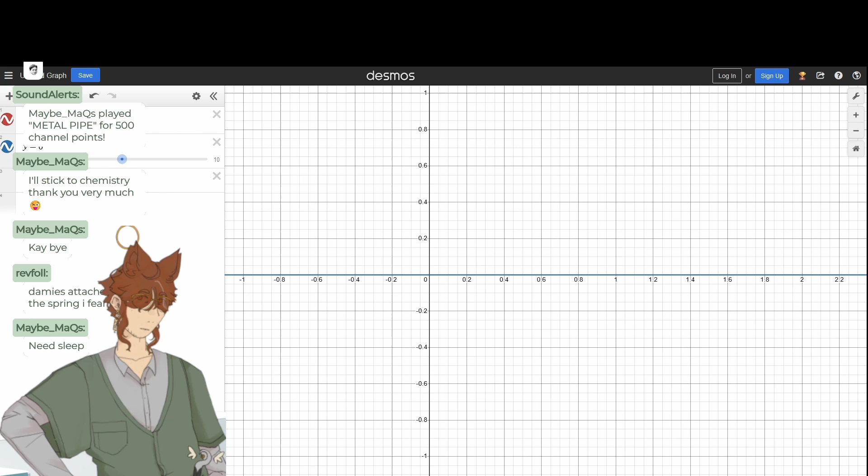Wait, why is it not showing any solutions? That's really weird. What if I just said it equals nothing? Oh. It never equals 0.

Did I get a thing wrong? Does it need to, like... wait, what if I said negative? Then that would be 1 point... Okay, wait a second.

We might be onto something. Every time I've said that, I've been wrong. What? 9 point... what? Huh, that's weird. Okay, so no, we're not onto something. I don't know what's up. I don't know what that is.

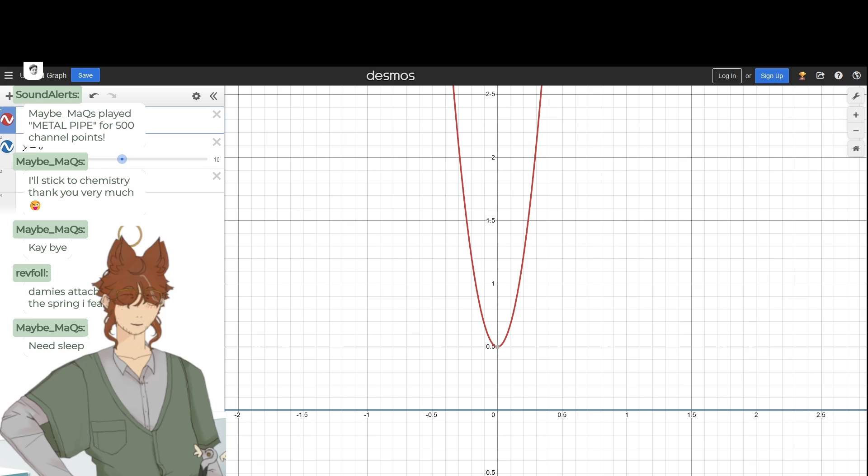I feel like I don't know what to do. Maybe it was just like that one time I did it, it was correct. Well, no, it says it's not attached to the spring.

Oh, hey, hello, how's it going? Cruz. I don't know, what the heck? I feel like the V...

Oh, it definitely has to be 0 at A, because that's the minimum it can be. Right, because what else could it be? Or maybe not, because it would be falling down from D to A, and there'd be gravity accelerating it, so maybe it wouldn't be 0. But I don't know how you would do that.

Can you help me with mu static? Oh yeah, sure. Static friction? Wrong one, there we go. What's up with your static friction? Maybe we can figure it out.

Maybe I can figure out more than this, or maybe I can't. Who knows? It's the beautiful world of... beautiful worlds. Maybe I'll do a conceptual question. Yeah, this one will be easy. Maybe I shouldn't say that.

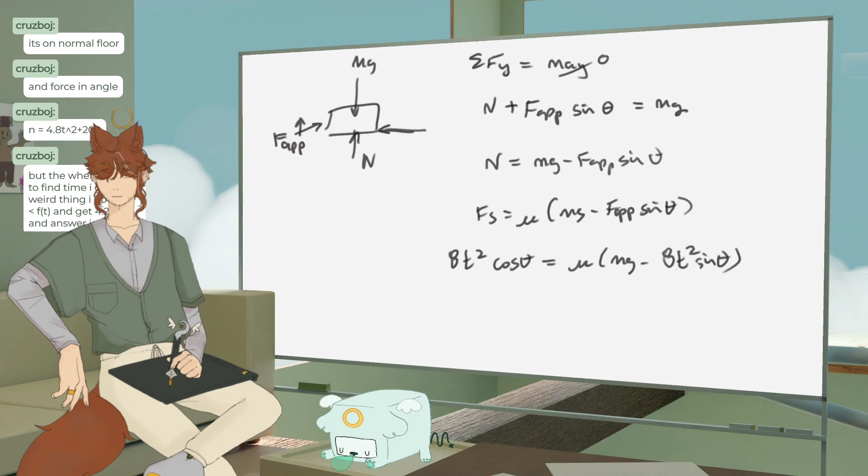Equals mu, which was 0.5, times 20 times 9.8, minus 8x squared. I'm gonna change it to x real quick.

Sparkle on! Oh my god, I'm sparkling. Sparkling for the sparkle gods.

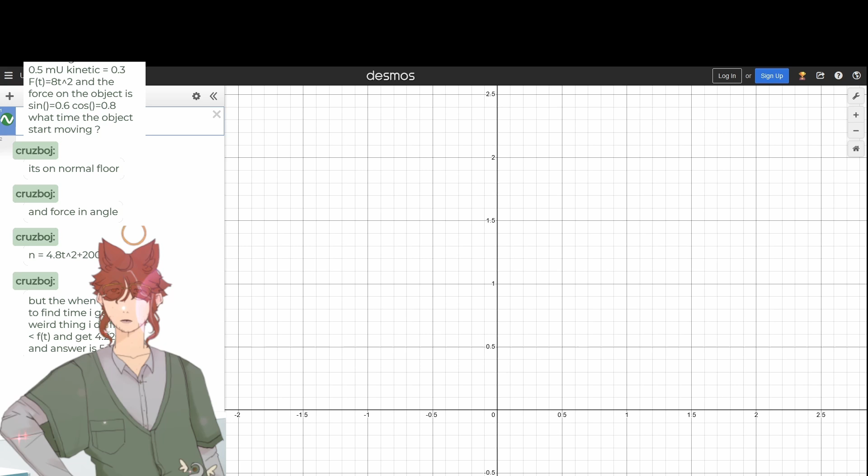Sorry, wait a second. Sine would be 0.6. Okay.

Oh, what? That's also not 5. Why? What the heck?

N equals, let me see. Where's the object? It should be right. I mean, I'm not accelerating in the upward direction.

Fs equals... Oh. Wait. No, yeah.

Because we do, so this is our equilibrium in this direction. And then if I were to do this, and not be silly about it, let's be more real about it. So if we do Fx equals 0, then we say F applied, I'll write it in, cosine theta, minus N equals 0.

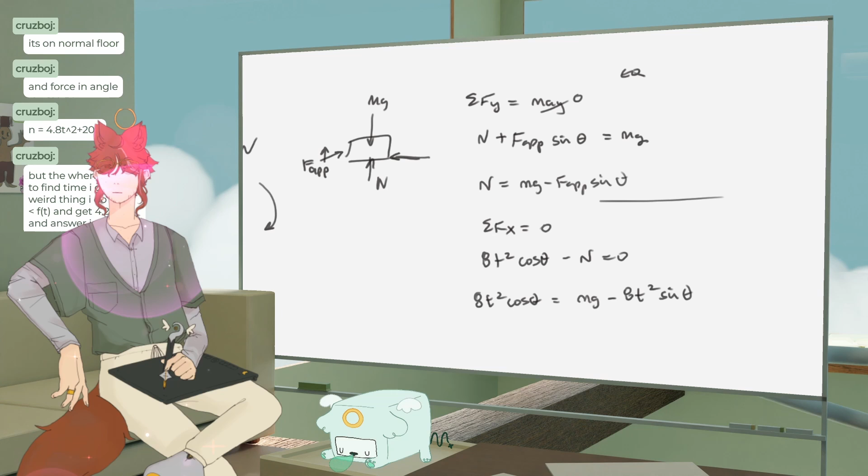Huh. Well, that's certainly like a start of the way there. I don't know if the numbers are clearly not working out, but...

Yeah. Sorry, I can't take you all the way there. I can see the problem. That might be a little easier too, but...

Oh god, this question is like awful. I dislike this question. Okay.

I mean, the answer that I think you can't give is like, well, the energy is the same at the top, so it's gonna make it around. It's not that easy. So we gain kinetic energy as we go up, we lose the kinetic energy. Now the question is I think you need a certain amount of energy, but it's like a force thing, you know, like to keep accelerating, because you literally will have 0 as you go here.

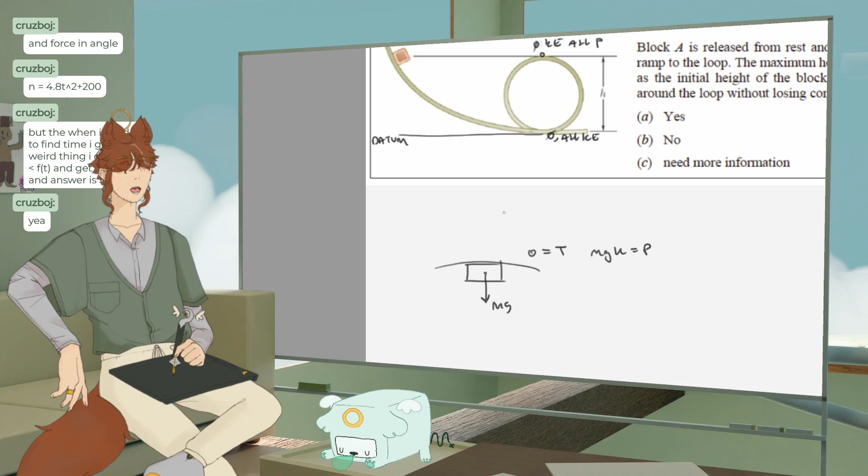I'm not sure. I think it goes like this. That doesn't make much sense, does it? I don't know. In my brain, I feel, without losing contact.

If I shake it, maybe it'll tell me the answer. Start beating up math problems in the back alleyway. Why are there so many of these problems? Oh god, there's still more.

Okay. Yeah, I think I might have to... Wait, when is this due? Okay, it's due on Friday, so we're actually chilling. I'm guessing I'll probably be better at it after tomorrow, but... Yeah, I don't know if I can do this one either.

This one, oh, I started doing this one. I don't know if you guys probably didn't see that one. This one too. What if I just like sink my teeth into all of them is the thing. That could be kind of fun, because then I could be like, ah, well, yeah, I see where I did this, and then I could like go off of it when I actually learn how to do it better. That'd be nice.

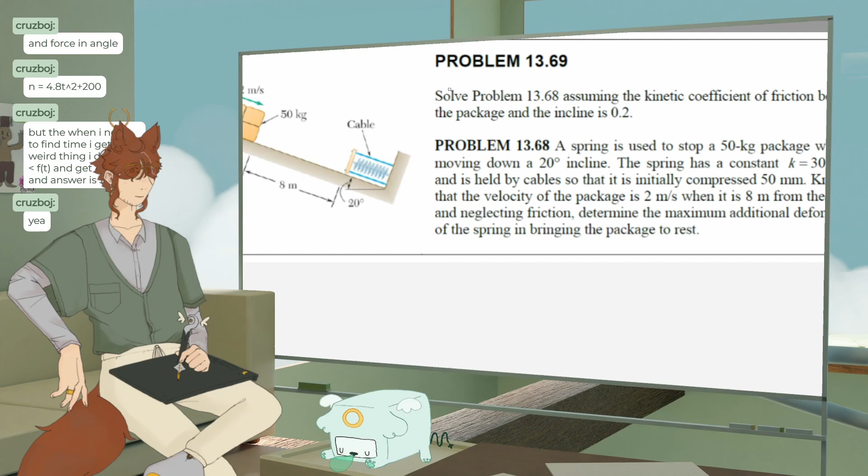Let's see, I'll just take a look at this one. God, okay. A spring is used to stop a 50 kilogram package, which is moving down a 20-degree incline. It has a spring constant of stuff. It's initially held by cables so that it's compressed 50 millimeters. Knowing that the velocity of the package is 2 meters per second when it's 8 meters from the spring. Okay, that's a crazy thing to say.

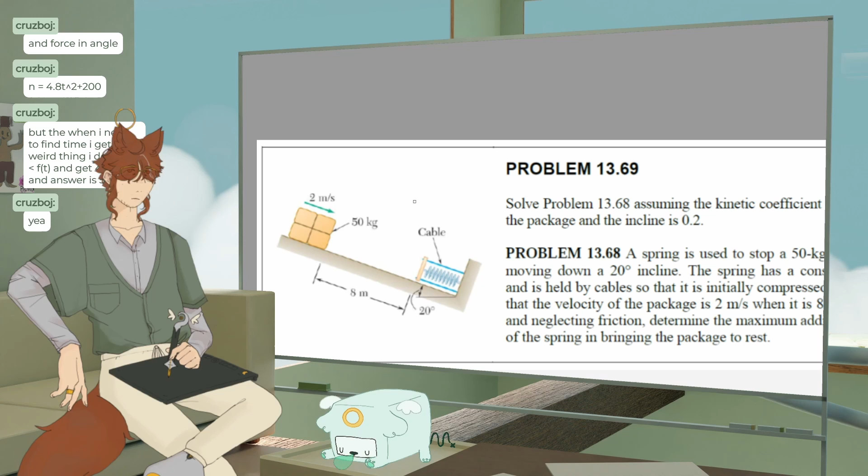Well, here's our state 1. Well, I don't actually even know if that's our state 1. When do we think about state 1 being? Well, yeah, this should be our very beginning state 1. And then, yeah, this should be state 2, where it's like here, compressing it. Probably. So if we have V, we're gonna have some V initial.

Oh, this sucks, but it's okay. I'm just going to say the bottom of this corner is going to be the potential energy, or wherever the center of gravity is. I think that makes it clear enough that it's zero.

Wait, but I need to know the distance then. Oh no, that's gonna be rough. It's okay, this will be the zero.

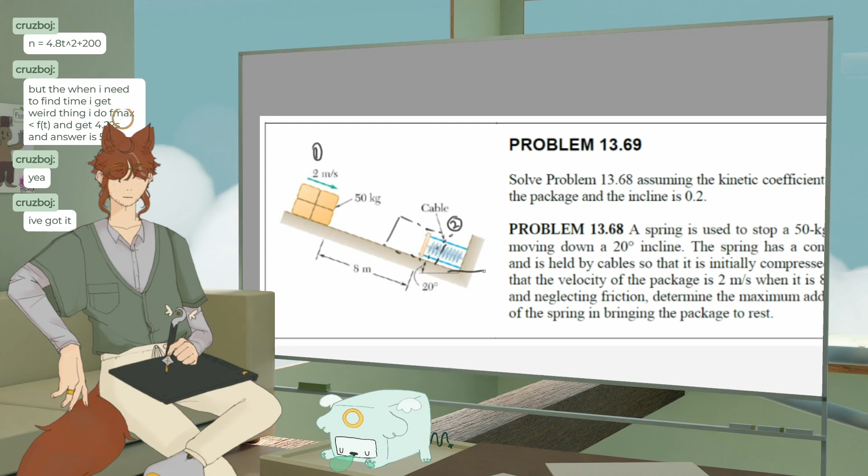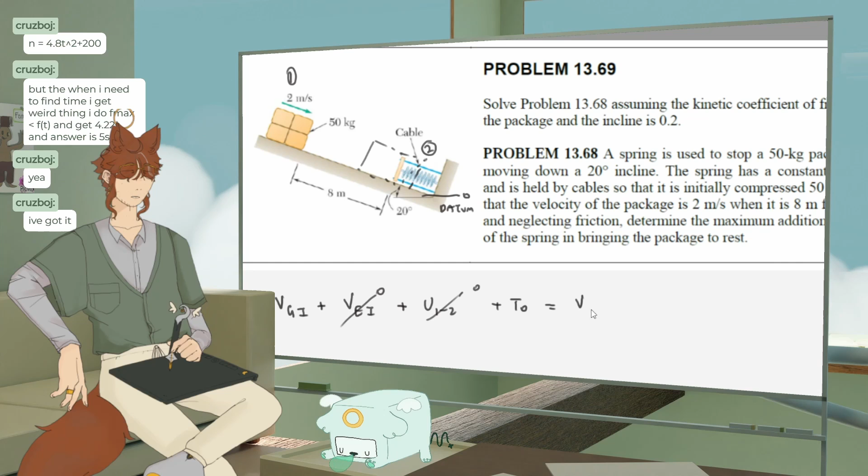Okay, I've got it. Oh nice. VGI plus VEI zero plus U1 minus 2 is going to be zero, equals delta T, or equal plus TO equals VGF plus VEF plus TF.

I don't know why I use I and O. I guess I should probably use O and O, right? Maybe 1 and 2. No, I don't like 1 and 2 as much. I feel like writing an O is just a little easier.

Oh wait, I have to... wait, there is friction. Never mind. Okay, I lied, we do have friction. I don't know how to do the friction part, but we're gonna leave that for another day.

Okay, so VGO. Okay, F, T squared times 8. Wait a second, now we'll see how close I was. 0.8, that's the cosine theta. Squared. T squared. Huh. 200. Oh, gravity, yeah.

Yeah, that's pretty close. Wait, so why is it T squared? Oh, maybe you just said F of T as in like it is T? Or was I not doing... was F of T not 8? Maybe that's why I was getting it wrong. If it wasn't 8, that would make sense. That's pretty close to this. I'll take it, I'll take it as a win, even though I didn't get it right. Whatever.

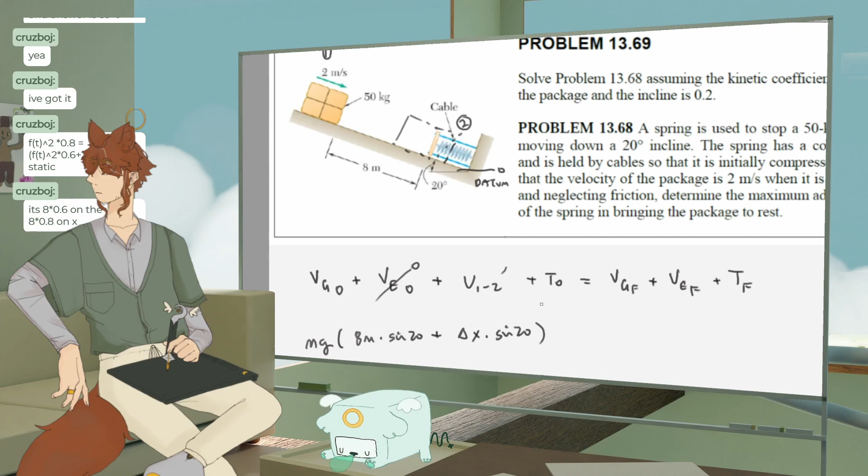So 8 meters, okay, first off, mg times we have 8 meters times sine 20 plus delta x times sine 20. That should be how much we compress it. Is that true actually? Delta x. Okay wait, no, 50 millimeters minus delta x times sine 20, I think.

It's 8 times 0.6 on the y and 8 times 0.8 on the x. Oh I see, yeah that makes sense. Oh, did I flip the two numbers? Did I flip the sine and cosine? I might have done that, on the x.

Let me see, wait, would that give you the right answer? I don't know, maybe. Doesn't give me the right answer if I flip them, but I don't know, anyway.

Okay, that's our VG0. I think things are gonna cancel out, which will be nice. And then VGF equals mg, and that's the 50 millimeters minus x, delta x, times sine 20. Yeah, so that'll cancel, which is good. Which I guess makes sense, but I guess it's good to think about that.